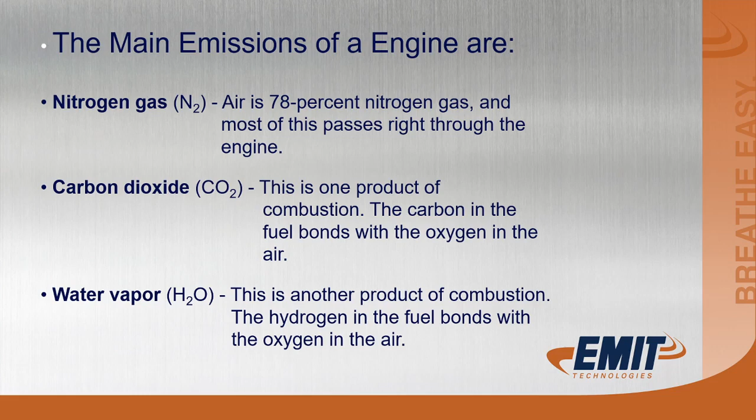Starting off, the main emissions of a natural gas engine are nitrogen gas, N2. Air is 78% nitrogen gas, and most of this passes right through the engine. Carbon dioxide, CO2, is one product of combustion, where the carbon in the fuel bonds with the oxygen in the air. Water vapor, H2O, is another product of combustion, where the hydrogen in fuel bonds with the oxygen in the air.

These emissions are mostly benign, although carbon dioxide emissions are believed to contribute to global warming. But because the combustion process is never perfect, some smaller amounts of more harmful emissions are also produced in engines.

Carbon monoxide, CO, a poisonous gas that is colorless and odorless. Is carbon monoxide bad for the atmosphere? No, it's not. Is carbon monoxide bad for human beings? Yes, it is. Carbon monoxide blocks the ability of your hemoglobins to be able to carry oxygen out to your muscles for your body to use.

Carbon monoxide in the atmosphere dissipates within 48 hours. If you filled a room with carbon monoxide and came back 48 hours later, there would be no carbon monoxide in the room. It would all convert to carbon dioxide. It's one of the easiest emissions to reduce, is carbon monoxide.

Hydrocarbons, or volatile organic compounds, called VOCs, are produced mostly from unburnt fuel that evaporates. Sunlight breaks these down to form oxidants which react with oxides of nitrogen to cause ground level ozone, or O3, a major component of smog.

One of the other VOCs is formaldehyde, HCHO. We're seeing a lot of regulation here in the United States on formaldehydes, and they're proving challenging to reduce on lean burn engines.

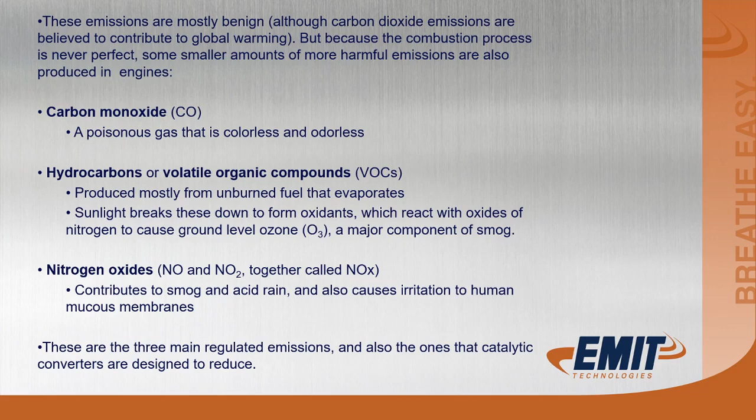These are the three main regulated emissions and also the ones that catalytic converters are designed to reduce.

Pollutants produced by an engine.

In order to reduce emissions, modern engines carefully control the amount of fuel they burn. They try to keep the air-to-fuel ratio very close to the stoichiometric point, which is the calculated ideal ratio of air to fuel. Theoretically, at this ratio, all of the fuel will be burned using all of the oxygen in the air. The stoichiometric ratio for natural gas is 17.2 to 1, meaning that for each pound of fuel or natural gas, 17.2 pounds of air will be burned.

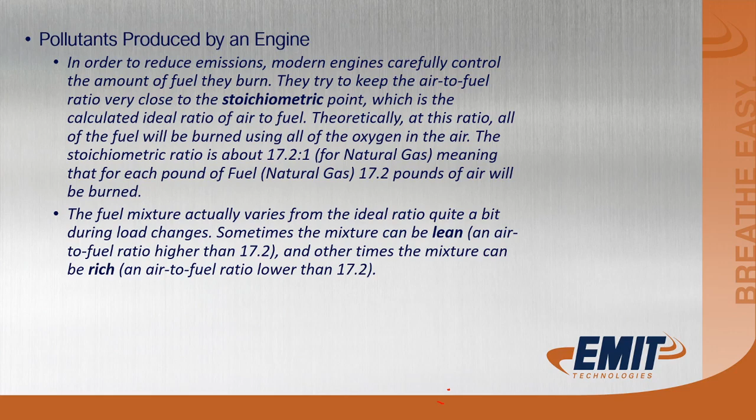The fuel mixture actually varies from the ideal ratio quite a bit during load changes. Sometimes the mixture can be lean, an air to fuel ratio higher than 17.2, and other times the mixture can be rich, an air to fuel ratio lower than 17.2 to 1.

So some of the different stoichiometric ratios: natural gas is 17.2 to 1. Propane is 15.5 pounds of air to 1 pound of fuel. Diesel is 14.5 pounds of air to 1 pound of fuel. Gasoline is 14.7 and ethanol is 9 to 1.

So now you can see why, when we convert an engine from diesel or gasoline to natural gas, natural gas takes up much more space than the gasoline or diesel fuel. Therefore, you literally can't get your bang for the buck out of the cylinder. Your volumetric efficiencies are off.

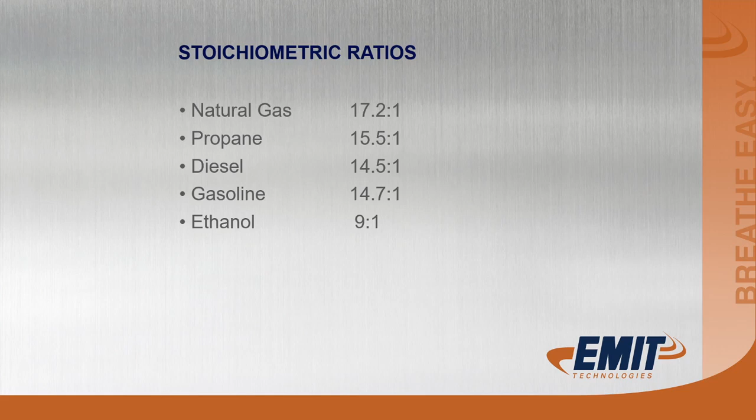Air, in a generic weight, is 1.2 ounces per cubic foot, and natural gas is 0.78 ounces per cubic foot. That tells us that natural gas is lighter than air. It's harder to fill that cylinder with natural gas than it is with air, therefore it takes up a lot more space than gasoline or diesel fuel.

Gasoline is 6.2 pounds per cubic foot, and diesel fuel is 7.1 pounds per cubic foot. Going back to natural gas, it's only 0.78 ounces per cubic foot. So with natural gas being 0.78 ounces per cubic foot, it takes up 127 times the space of gasoline for the same weight. Therefore, it's very hard to charge a cylinder with enough to make a good burn.

Oxygen. What is air? Air is a mixture of several gases that are invisible and odorless. It consists of 78% nitrogen, 21% oxygen, and then less than 1% of argon, carbon dioxide, and other gases. That being said, the 78% nitrogen has absolutely no value to an internal combustion engine. Matter of fact, that 78% nitrogen is where your NOx is coming from.

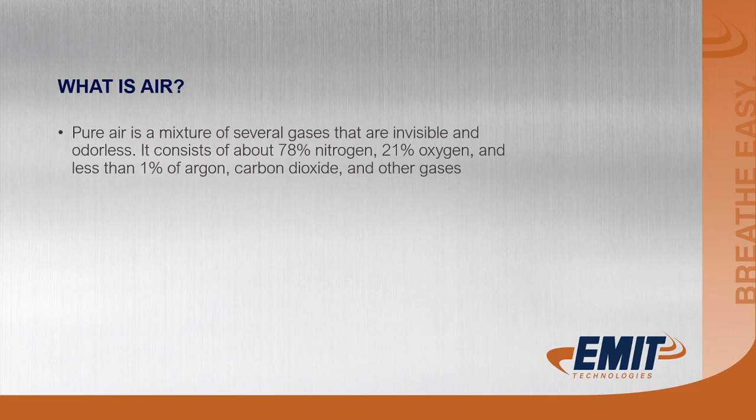Some of the things on an internal combustion engine that can change are valve timing, compression ratios, things like that.

Let's look at where carbon monoxide comes from. When air and fuel come into a cylinder, they are mixed. If you have cold combustion and too much fuel, you'll produce a lot of carbon monoxide. If you have early combustion and high cylinder pressures, therefore high cylinder temperatures, you're going to produce a lot of NOx.

Other characteristics of an engine in the cylinder include cylinder wall quenching. When the gases are mixed together, they're ready to burn. If you had the absolute perfect carburetor or fuel injection system, and your air and fuel could be mixed perfectly, it's not possible for that engine to consume all of that fuel and air. The reason is temperature. Your cylinder walls are cold, your piston's cold, your valves are cold, and any gases next to the cold metal components don't burn. They partially burn, so you have oxygen and fuel, unburned hydrocarbons, going out the exhaust.

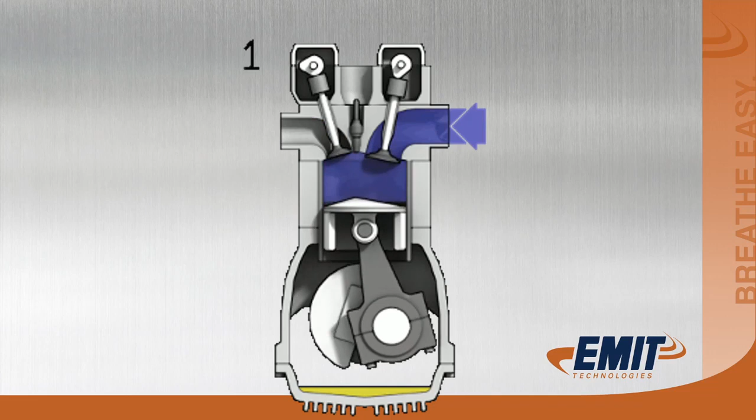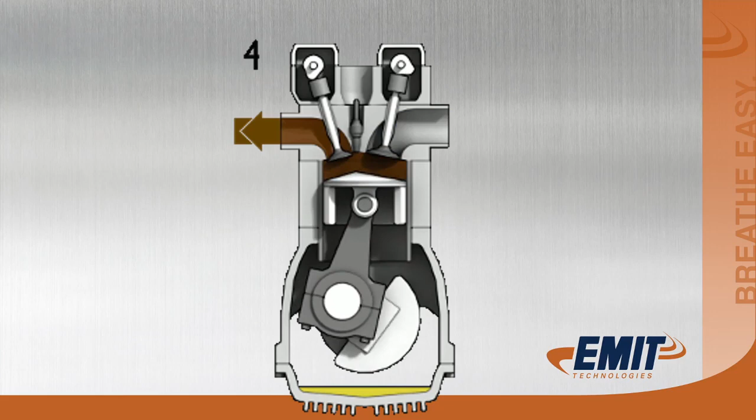The hotter the engine runs, the less unburned hydrocarbons you have. The colder an engine runs, the more unburned hydrocarbons you have. Therefore, you always need to have your engine warmed up before you start testing emissions.

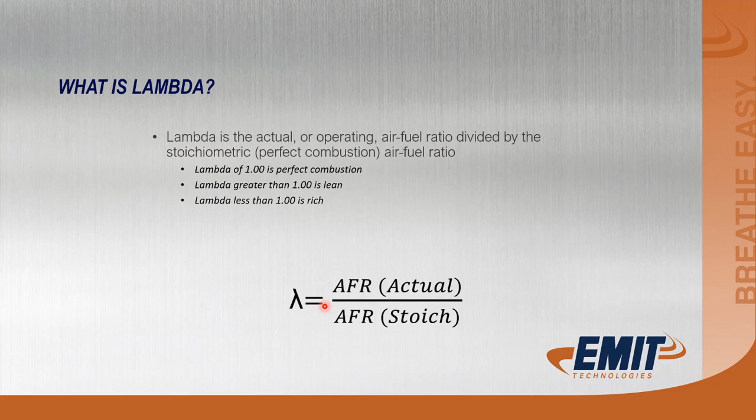The way I lay this out typically on the board: I'll assume an engine runs at 10 to 1, making up our own numbers for easy math. If I ran an engine at 10 to 1, meaning for every pound of fuel I was putting in 10 pounds of air, that makes for easy math. If that engine was using 15 pounds of air for every pound of fuel, that would be a lambda of 1.5. If we were running 5 pounds of air to every pound of fuel, that would be a lambda of 0.5, half of what the actual is.

That's typically where I draw it out on the board and do the math, and then they understand it. An example: if the stoichiometric air-fuel ratio was 10 to 1 and the engine was running at 15 pounds of air to 1 pound of fuel, the lambda would be 1.5, or 15 to 10.

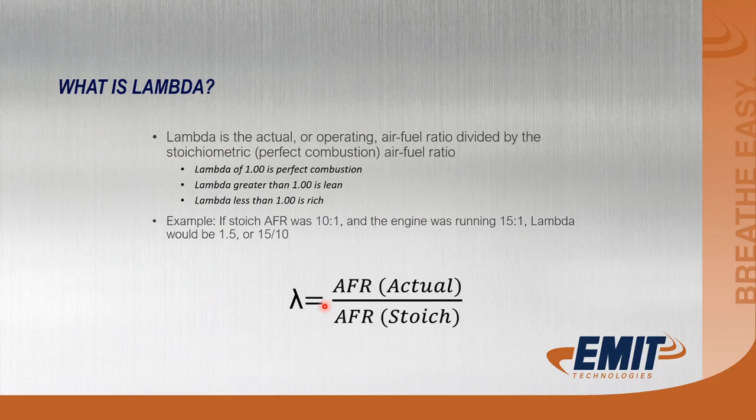Other things that affect the emissions of an engine are valve timing. It is extremely critical to have your valve timing correct on an engine. Most camshafts are designed for an engine to run at 1 RPM. Take the analogy of when you get your muscle car or your Harley Davidson and put a big camshaft in it - what does that do? Other than making it sound good at the stoplight, it really doesn't do much other than now you can turn a higher RPM.

So what does this all mean? Let's start here: the intake valve opens, actually ahead of top dead center. Let's follow that around. Your piston is going down, then coming back up. Now it reaches top dead center, and now it's walking itself down, pulling in air and fuel that are mixed together, and we reach bottom dead center.

Now it doesn't seem logical when you think like a syringe. If you were pulling that piston down, think of a syringe - it's coming down, and you've reached the full travel on the cylinder. The cylinder isn't necessarily charged because of the speed the piston is dropping; it takes more time to fill that cylinder. Because air has mass, and mass has inertia, that's going to carry in - it continues, even though the piston is starting on its way back up, the air is still rushing into that cylinder.

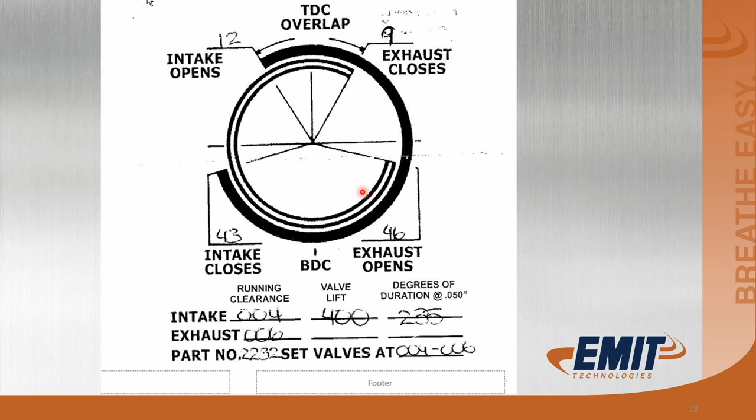Ignition timing has a very large impact on emissions in an engine. So we'll look at this chart, and down here you see negative work and positive work. This right in the middle is top dead center. So we're going to light the fire. Our spark is going to go ahead of top dead center. Why is it that we light the spark ahead of top dead center?

Because it takes time for the fuel to burn. Flame propagation. It takes time for that fire to get going and those exhaust gases to heat up. At the same time, your piston was still coming up at this point.

Now, let's imagine this. This is the perfect scenario right here. We lit the fire, our power curve came up, our cylinder pressures are coming up real nice, and then as the crankshaft is rotating and the piston is dropping down, our cylinder pressures are dropping down just perfect. So we got a really nice burn here. We should be running approximately 3,500 to 5,000 ppm CO, and we should be running between 1,500 and 2,500 parts per million NOx right here.

What happens if our timing's too late? Well, our cylinder pressures are really low and we don't get a good clean burn. So then what happens is as our pressures go down, all of a sudden the thermal gases expand. We don't produce any NOx. We produce real low amounts of NOx because we don't have any heat, and we've consumed all of our oxygen with that fuel with late timing and real low cylinder pressure. So right here we'll have high carbon monoxide and low NOx. This right here will have a nice combination, a 2-to-1 ratio of our carbon monoxide to our NOx.

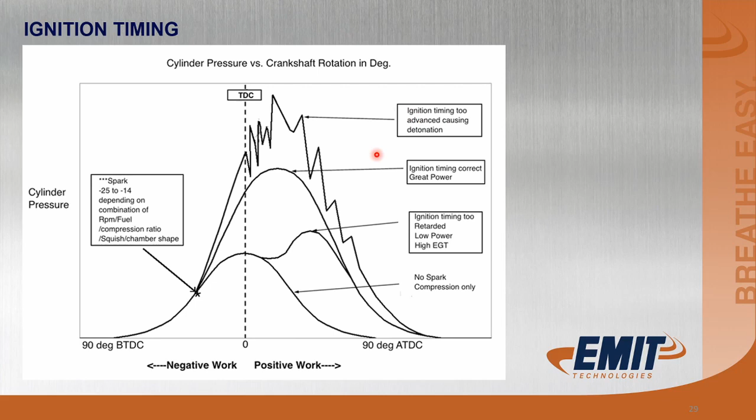How do we measure emissions? We use grams per brake horsepower hour. What does that mean? Grams per brake horsepower hour is how it's spelled out on your permits, and we can use that to convert it to pounds per hour, tons per year, or any weight increment you want.

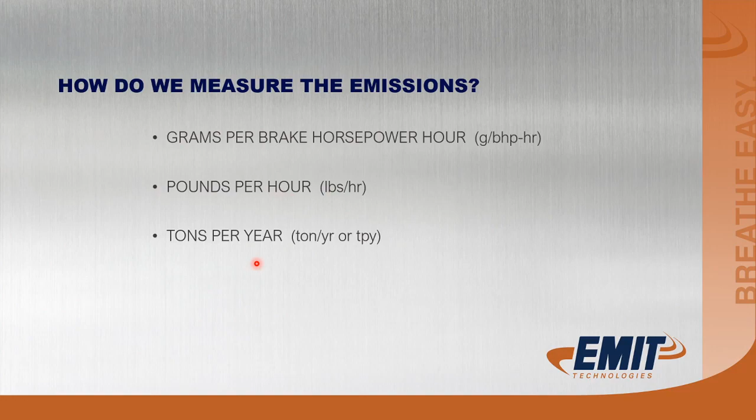What does grams per brake horsepower hour mean? If we break it down, it sounds complicated, but it's not. Grams is a weight. If we had a 1 gram engine, 1 horsepower, and 1 hour, that would be 1 gram of pollutant if that was a 1 gram engine.

Let's think about how this works. Grams is weight, brake horsepower is performance - how much work did we get done - and this is time. Now the thing we have to understand is horsepower. What is horsepower? We don't have dynos out on these units, so we have to extrapolate what the horsepower is doing, typically by knowing how much fuel was going into the engine.

So if we had a 1 gram permit and a 100 horsepower engine, in 1 hour you could produce 100 grams of pollutant.

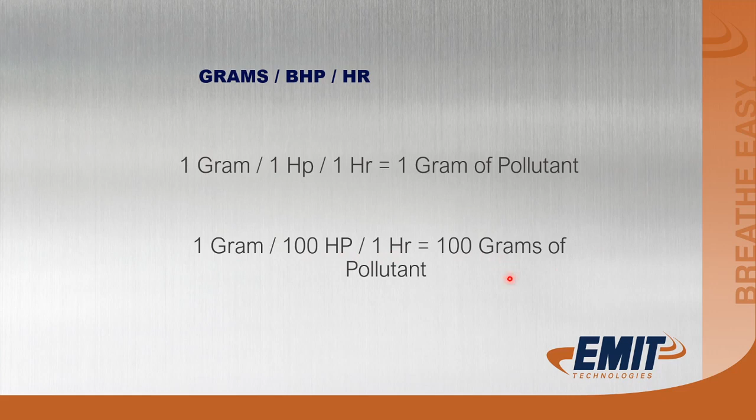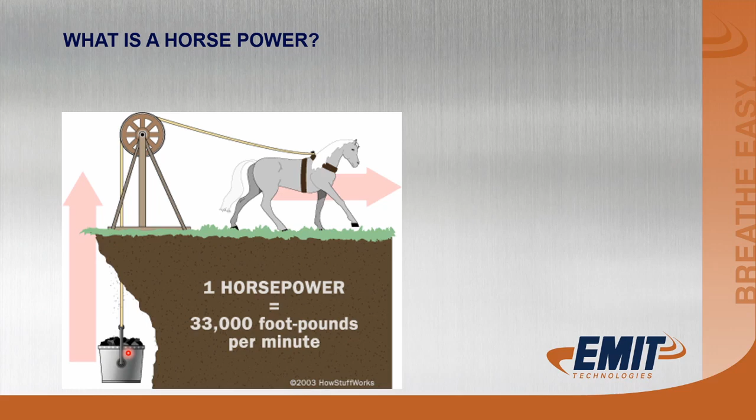James Watt came up with the horsepower calculation. One horsepower equals 33,000 foot-pounds per minute. In other words, a horse could pick up 33,000 pounds, 1 foot, walking for 1 minute. That's how they calculated horsepower.

How much natural gas does it take to make 1 horsepower? Ultimately, that's how we determine how much horsepower we're using, by using engine manufacturer specifications and how much fuel it takes to make 1 horsepower.

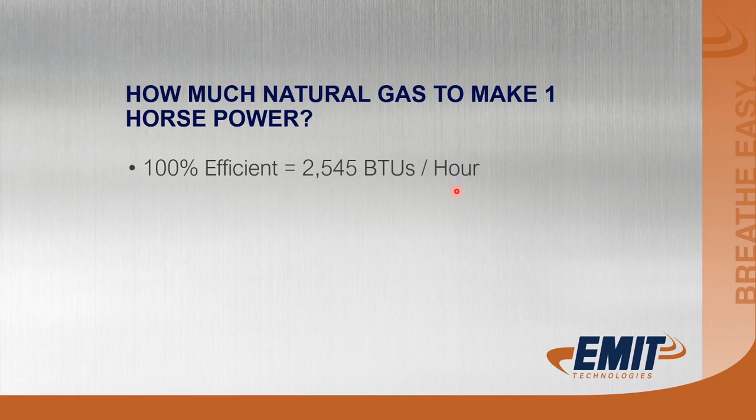100% efficient is 2,545 BTUs per hour. That's at 100% efficient, but no engine is 100% efficient.

Rich burn default is 9,400 BTUs per hour to make 1 horsepower, which tells you how inefficient a rich burn engine is at converting fuel into horsepower. A lean burn engine default is typically around 8,600 BTUs per hour, making it more efficient at making horsepower out of the fuel given.

Horsepower as it relates to BTU: horsepower can be defined as 2,545 BTUs to make 1 horsepower in 1 hour. However, most of the available BTUs in the fuel are wasted as heat exiting in the exhaust. For an engine to produce 1 horsepower in 1 hour, it consumes approximately 10,000 BTUs. This value is very useful for determining regulator and fuel delivery piping sizes.

You can also determine, when out on location, how much horsepower is being made if you have a fuel flow meter for that location. You can look at the fuel flow meter and know approximately how much horsepower you're utilizing. Actual fuel consumption ranges between 7,000 and 10,000 BTU per brake horsepower hour.

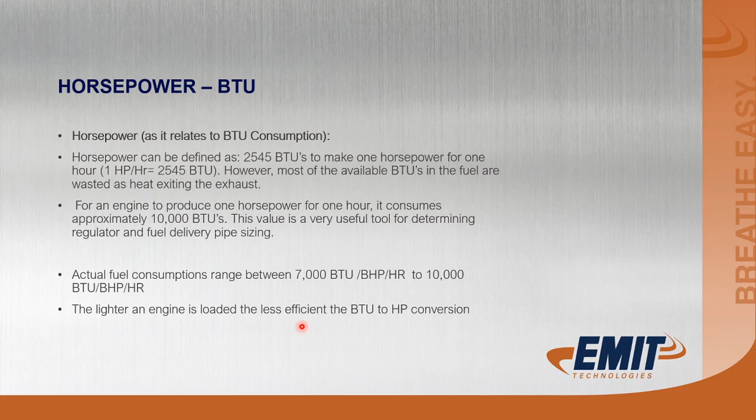This is very key to remember: the lighter an engine is loaded, the less efficient the BTU to horsepower conversion is. In other words, work the engines hard and they convert fuel into horsepower much better than if they're lightly loaded. You'll get much better emissions on an engine with a good load versus one that does not have a good load.

One of the ways we determine it is by using GERP on a Caterpillar engine. Caterpillar provides information that makes it much easier to determine what that horsepower is, so we don't have to assume defaults of 9,400 or 8,600 BTUs for rich or lean burn.

So when you pull up a GERP sheet from Caterpillar, you can look at the load. As you're looking at this load, brake horsepower on this particular engine is a 3306B. It's an 1,800 rpm engine, aftercooler, water jacket. You can look at all the specs all the way down.

It's a catalyst setting engine. Exhaust oxygen is at 0.3% oxygen. We know this is a little rich burn Caterpillar 3306. So now, it's capable of 203 horsepower at full load. At full load, we can see its efficiency is 8,100. It's actually a very efficient little engine when we have a full load on it. For a rich burn engine, that's great.

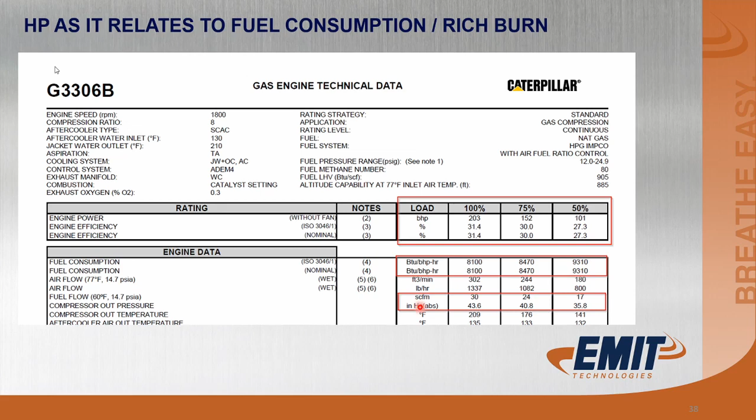As we drop in horsepower to 75% at 152 horsepower, look at our fuel consumption per horsepower, brake specific fuel consumption. The brake specific fuel consumption goes up, and we get down to 50% load. We know that it's extremely inefficient at 9,310 BTUs per brake horsepower hour, and when it was loaded, it was 8,100 BTUs per brake horsepower hour. We can do it in standard cubic feet, or we can do it in BTUs.

Now, if we look at a 3516 Caterpillar, which is a lean burn, this one's going to run at 1,400. Compression ratio is 8:1, and so was the rich burn on the 3306B, 8:1. But we're gonna turbocharge the heck out of this thing. We're gonna push a lot of air into it, and for a lean burn engine, we're gonna push the NOx level down to 0.5 grams per brake horsepower hour. Now let's look at this. Per brake horsepower hour, we're making 1,380 horsepower on this particular 3516.

And when we look at the fuel consumption, it's clear down around 7,301 BTUs per horsepower being produced. If we drop clear down to 50%, we can look again. That's going to be 690 horsepower, and the fuel consumption now jumps way up to 8,399.

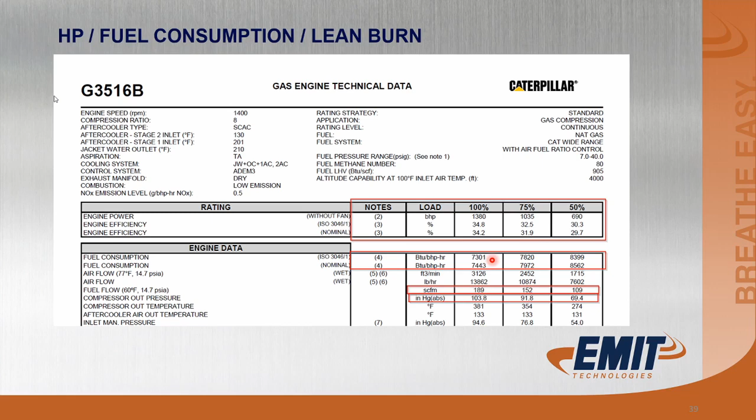So you're always better to use factory specifications if you have them. In the US, the EPA defaults to those 9,400 and 8,600 respectively when you don't have performance data for the engines. Always best to have the actual performance data from the manufacturer.

Just an interesting piece of information: it takes 641,186.5 calories to make 1 horsepower in 1 hour. All right, so now to convert those grams to brake horsepower hour, we know that it takes 28 grams to make an ounce, 16 ounces to make a pound, and 2,000 pounds to make a ton. That's how we convert our grams into pounds per hour or tons per year.

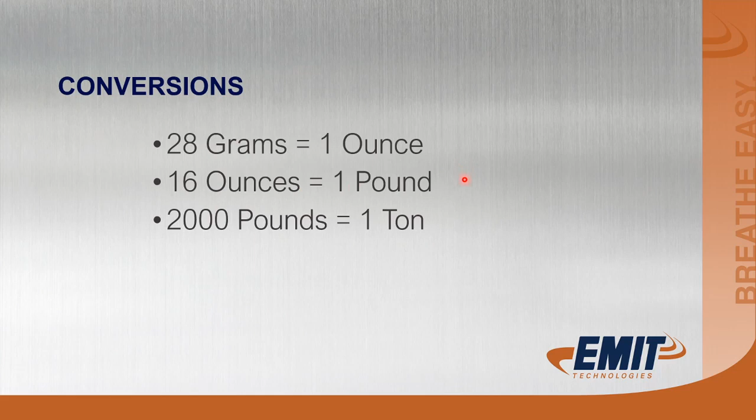They tend to fail in high VOC, high unburned hydrocarbon environments. The cells will saturate and they'll either ruin the cells, or the cells will take quite a while to air out till the next day before you can use it again. And those cells are typically in the $500 a piece, so you don't want to be messing them up. And it only takes a few minutes to ruin one. So this should always be using an analyzer - same guy should use it, or the people using it should always be trained.

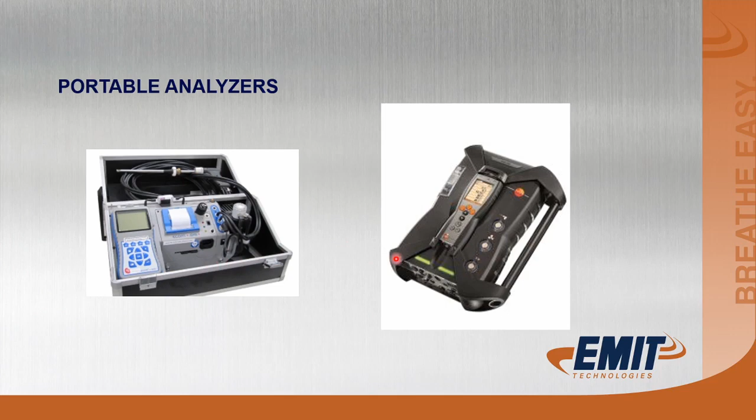On this 100 horsepower uncontrolled engine, it starts out about 6,500 parts per million CO, which equals 17 grams per brake horsepower hour. At 100 horsepower that equals 1,700 grams per hour. Divide that by 28 grams to get an ounce, you get 61 ounces an hour. Times 24 hours equals 1,464 ounces per day. Divide by 16 ounces to get pounds, you get 91.5 pounds per day. Times 365 days a year, that's 33,397 pounds per year. Divide by 2,000 to get tons, and you get 16.5 tons of carbon monoxide off that little 3306 running 24/7, 365.

We can run through the same equation with the NOx. NOx is a little bit heavier, so it doesn't take as much to get the weight there. Here we're only starting at 2,200 parts per million, which equals 10 grams per brake horsepower hour. Running through the equation, we get 9.7 tons per year. Using the same math, we come up with 7 tons per year for hydrocarbons. This little uncontrolled 3306 cat is making about 33.2 tons per year of exhaust pollutants.

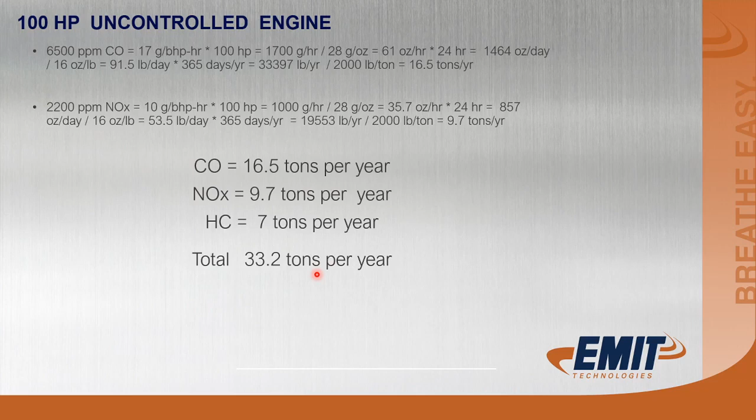Now what happens when we add a catalytic converter to this? If we add a catalytic converter and an air-fuel ratio controller to the engine, and we drop the emissions down to 0.5 grams per brake horsepower hour, which is a pretty standard emissions level in the United States for non-attainment areas, that took that number from our 33.2 tons per year down to 1.228 tons per year. That's a pretty significant reduction in emissions. So that's why we run a catalytic converter and an air-fuel ratio controller.

What is a catalyst? A catalyst is a substance that affects the rate of reaction without itself being consumed by the reaction. Generally they increase the rate of reaction, but they can also slow down the rate of reaction due to a change in the specificity of the reaction.

Let's break this down into something simple. Everybody's worked with concrete. If you have some concrete aggregate, some rock and sand, and then some fly ash and some concrete powder, and you mix it all together, it does absolutely nothing. It's just dirt and sand and rock and some fly ash and cement powder. But we have to add water to that concrete. If we add water, we start to build heat and things start to happen. That's the part where generally they increase the rate of reaction. If we didn't add water to the concrete, nothing would happen.

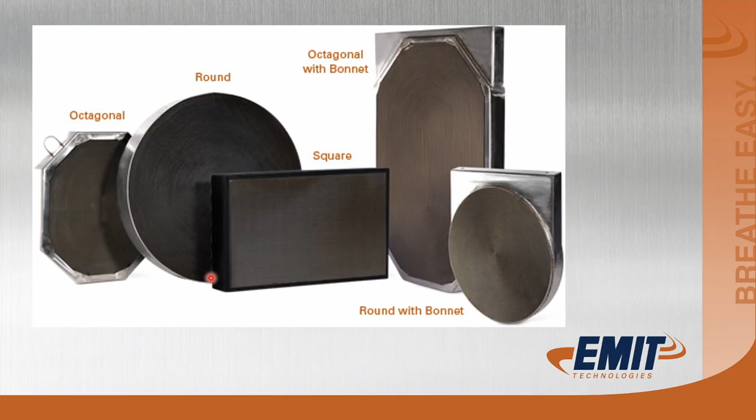There's a lot of different shapes when it comes to catalysts, and a lot of different manufacturers out there. There's octagonal, round, rectangular, octagon with a bonnet, round with a bonnet. A lot of different shapes.

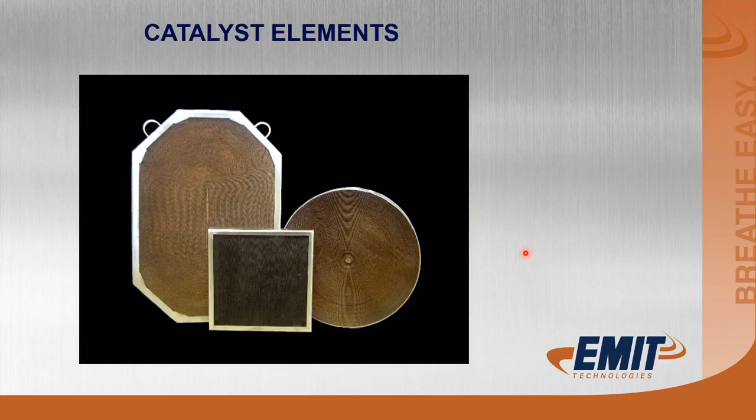If a catalyst is brand new, sometimes you can tell whether it's an oxidation or a three-way catalyst. Oxidation catalysts will typically have a little bit of a brown or goldish hue to it, while a three-way catalyst is typically a darker brown or darker black color. Once they've been run, you can't tell that anymore.

Now, how is a catalyst made? We start out with ferritic stainless steel. Ferritic stainless steel is magnetic, you can stick a magnet to it and it'll attach, whatever you'd like. That's how the properties on this foil oxidize. The foil is really thin.

It's about 2 thousandths thick, that's all that foil is. Very, very thin. So we have a flat sheet, and then we take another flat sheet and run it through a set of dies, and that corrugates the foil and starts to roll it together.

In years past, this was a standard way of manufacturing the catalyst element, but there were a lot of challenges related to this due to telescoping. The foil would come unraveled and wouldn't sustain backfires very well.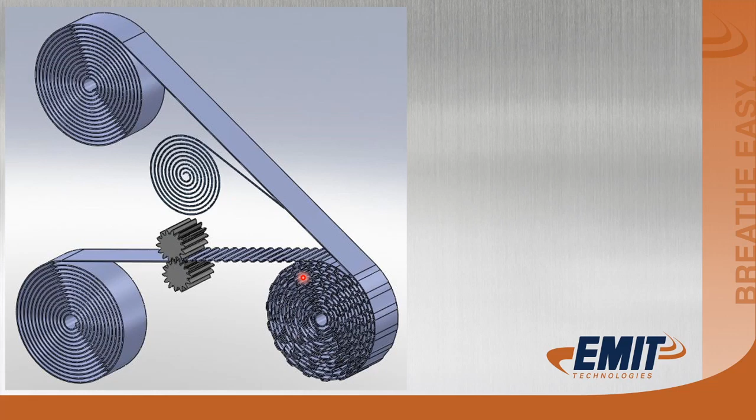As we roll it up, the foil goes over top of the nickel and is rolled up within it. Once the catalyst is completely made and made to the diameter needed, it's put in an oven and heat treated. At that time, this nickel sweats out like solder or brazing and welds all these high points together, making it a solid or rigid substrate. Makes it very strong. No more coming apart or failing during backfires or telescoping from heat in the center.

So the corrugation is typically an equilateral triangle. Both sides of this are the same, all sides of the triangle are the same dimension. That's how we get a lot of square footage in the foil itself.

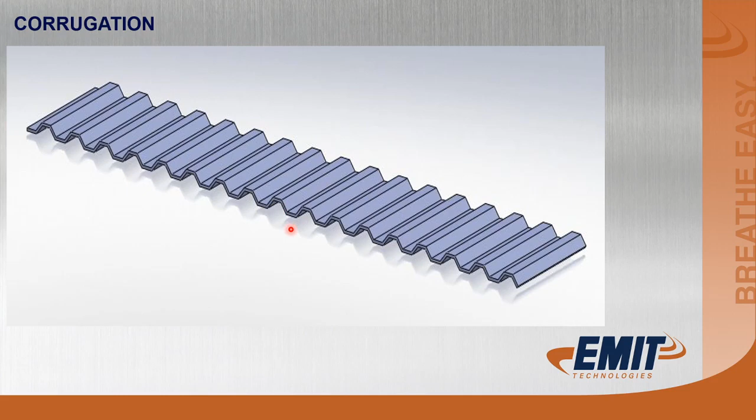We get a lot of surface area so that we can attach our wash coat. So the bottom sheet, this is 2 thousandths thick. This foil is 2 thousandths thick. This is 2 thousandths thick. We add the top sheet.

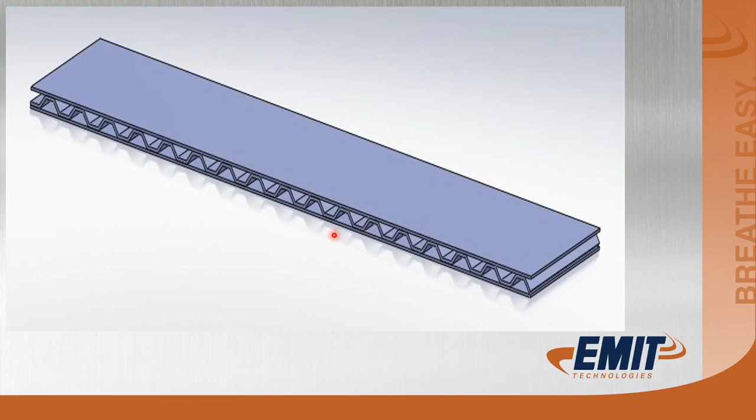It seems like it'd be restrictive, but this is a 90% open area. There's not much restriction there. It takes an awful lot to plug a catalyst up. When you do plug a catalyst up, you know you've got some pretty serious issues.

It's just a slide with the brazing, showing the brazing, the importance of where it's bonded together and how much stronger it makes it.

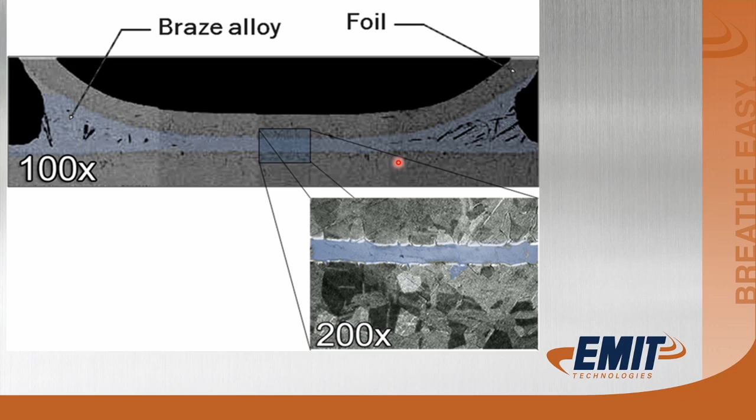This is just a slide to tell you that an unbrazed catalyst, if you laid it on a table, it would take 461 pounds on a 14.5-inch catalyst to start separating it if you had it pushed down overhanging the edge. If you had a brazed substrate hanging over the edge of a table halfway, it would take 3,120 pounds to break that.

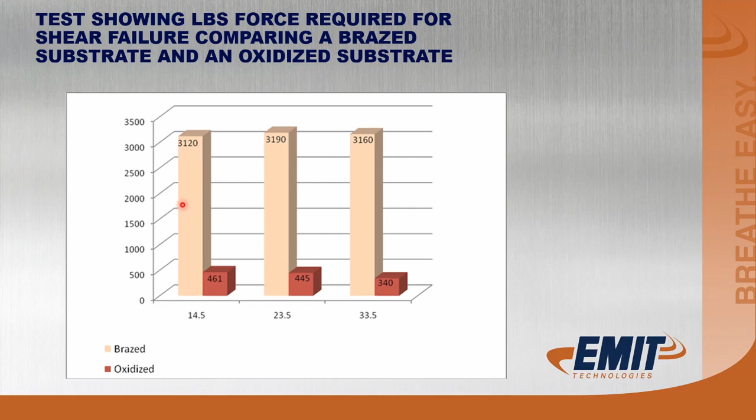These are the benefits of a brazed catalyst element versus an unbrazed catalyst element.

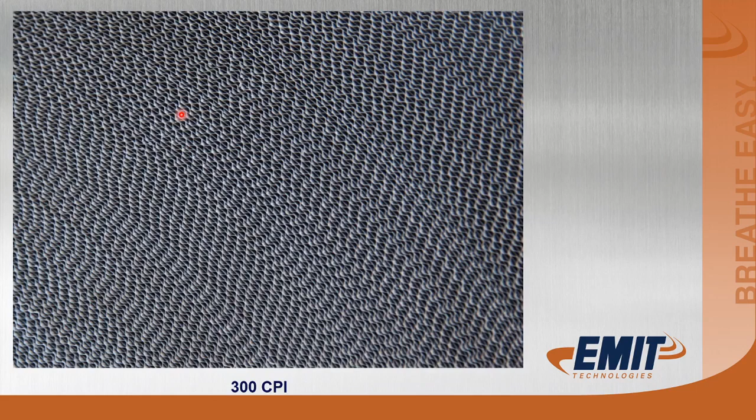This is what 300 cells per square inch look like. Doesn't seem possible, but there's 300 cells per square inch here. A closer look, you can see the foil where it's stacked up, and where it's brazed. All of those contact points are brazed together with the nickel, called rigid substrate.

What do we put on the catalyst? Well, when the catalyst was in this state here, it had no wash coat on it at that point. The catalyst was just stainless steel, it wasn't going to do anything for you, just a big spark arrestor. But then we use a mixture of platinum, palladium, and rhodium.

These precious metals are ground up microscopically fine and then put into a slurry or wash coat where they can be spread out across the catalyst foil.

Why do we use platinum, palladium, and rhodium? Why don't we use something else? Well, when you think about it, platinum is white gold. All of these things are very corrosive resistant. They withstand high temperatures, and they each have their own properties when working or reacting with the exhaust gases.

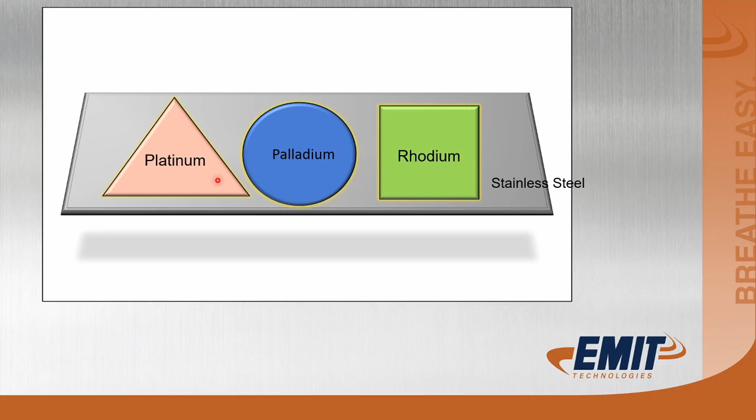If we took a really close look at the foil, this would be our 2 thousandths thick foil, and this would be our wash coat. Mixed in that wash coat are these microscopic particles of the precious metals.

What are some of the things that damage a catalyst? There's a lot of things that'll damage a catalyst. If we get it really hot, over 1250 degrees, this alumina wash coat starts to collapse. It's the carrier. The precious metals are still there, but it traps them in an area where the exhaust gases can't get to them. Nothing happened with them, they're able to react just fine, but the gases are not able to get to them.

I always make the analogy, think of a styrofoam cup. If you heat up a styrofoam cup too much, it'll collapse into almost nothing.

You still have all the styrofoam there, but it isn't doing any good whatsoever. These areas are where exhaust gases can migrate through and make contact, and these are called sites. The more we heat it, the fewer sites become available. The catalyst is still functioning at this point, but not the way it was when new, before we melted the wash coat of alumina.

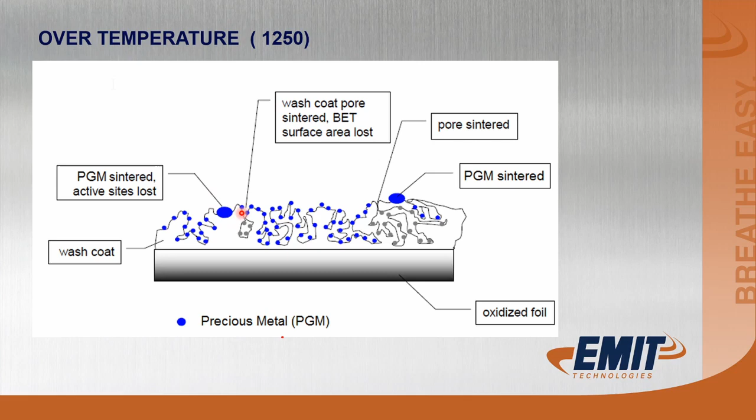Sintering is when you get it really hot, hot enough that you've melted the precious metals, and now your platinum, palladium, and rhodium have all bonded together. They are worthless at that point. You have no surface area, not enough areas to make contact.

The precious metals, active metal or base metal elements which are active in the combustion reaction, are platinum, palladium, and rhodium. These metals are known for their purity, high melting points, and ability to stay stable at high temperatures. In addition to stable oxidation and reduction properties, they are also extremely resistant to corrosion.

Platinum and rhodium are effective in reducing NOx. Platinum and palladium are effective in oxidizing CO and VOCs. Platinum is more poison resistant, palladium is more thermally stable. So the idea behind mixing these three items: you can have more platinum and rhodium to reduce NOx better, or more platinum and palladium to reduce CO. If you want a catalyst to reduce NOx better, add a little more rhodium. If you want it to reduce CO better, add a little more palladium.

Platinum is more poison resistant. What do we mean by poison resistant? It means it can take on things like cyanide, which will kill almost any catalyst. Ethylene glycol, or antifreeze, destroys a catalyst very quickly. With engine oil additives and things in the gas coming into the engine, platinum is going to stand up to that a little bit better.

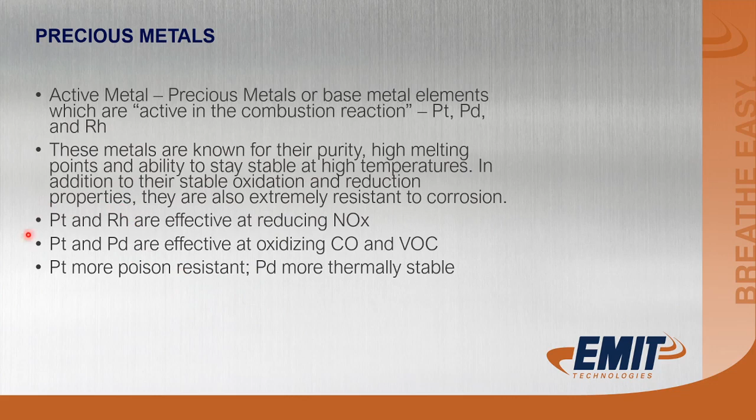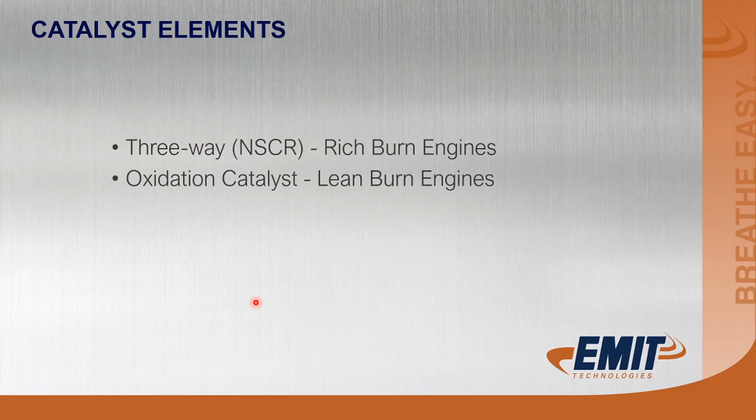Catalyst elements: three-way, or NSCR—non-selective catalytic reduction—is for a rich burn engine. Oxidation catalyst is for lean burn engines. Oxidation: if an electron is lost, then an oxygen will be gained. Platinum and palladium reduce CO and VOCs. Redox, or reduction oxidation: if an electron is gained, an oxygen will be lost. Platinum and rhodium reduce NOx.

NOx is the hardest thing you're going to be able to reduce on a rich burn engine, and you can't reduce it on a lean burn engine outside of post-catalyst treatment like SCR, selective catalytic reduction. When an engine isn't set up correctly, this becomes the first thing that fails—your NOx reduction fails the quickest. If you have exhaust leaks, misfires, or anything that increases the oxygen content in the exhaust gases, you will fail to reduce your NOx.

We have to use up all of the oxygen. If an electron is lost, an oxygen will be gained. So when we're reducing carbon monoxide, CO, we need free oxygen to turn that into CO2, carbon dioxide. We use up all of the free oxygen making carbon dioxide, and once we've used it all up, that's how our NOx is reduced—it goes after this oxygen. The carbon monoxide is still very active in looking for oxygen to convert to CO2.

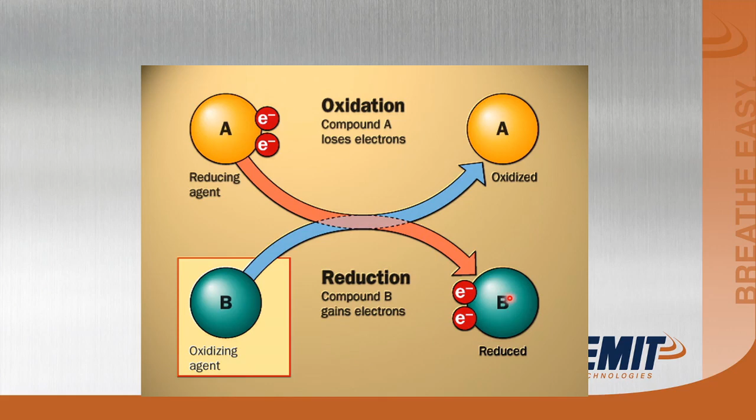NSCR is a term we use for non-selective catalytic reduction. In the presence of oxygen, the oxidation of CO and VOCs are preferred. Like we spoke earlier, CO and VOCs will oxidize very easily when there's oxygen present. Therefore, in order to get NOx reduction, you have to limit the amount of oxygen available in the catalyst. This is a rich burn we're talking about now. Typically, exhaust oxygen levels between 0.3 and 0.5% to obtain appreciable NOx reduction. And you need the temperature between 500 and 1,000 degrees to achieve maximum reaction rates. Typically, once you get over 450 to 500, the catalyst isn't going to reduce carbon monoxide much better.

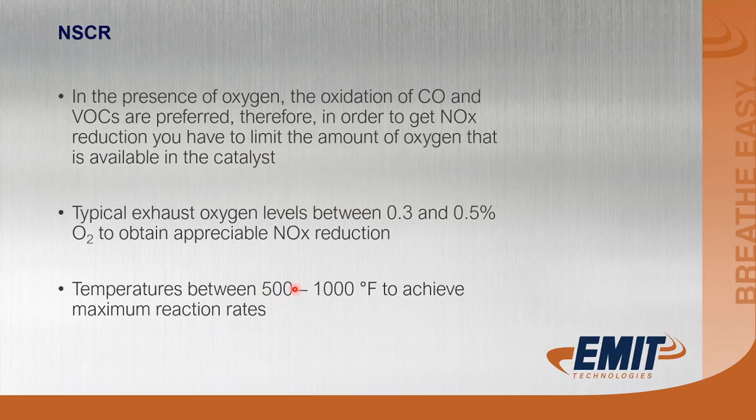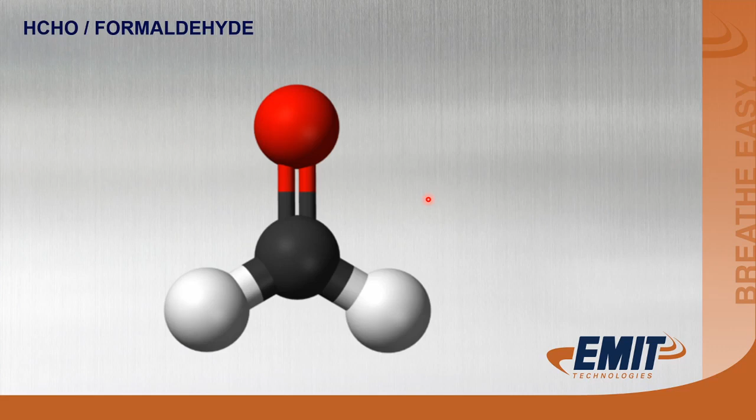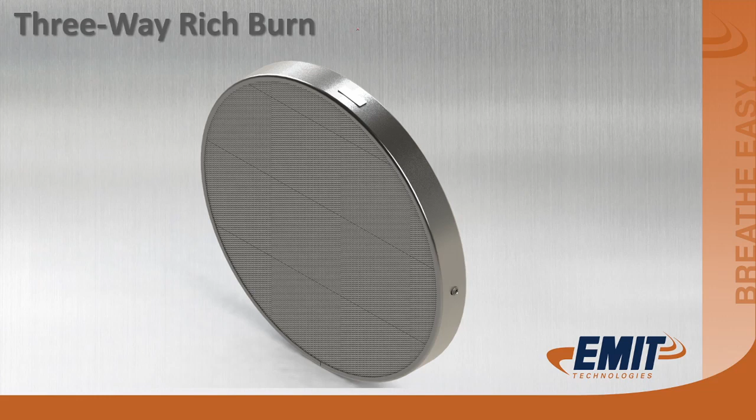We're going to go through the three-way catalyst or rich burn catalyst. Another name for the rich burn catalyst is NSCR, non-selective catalytic reduction. Now, one of the things that's always in an exhaust stream is oxygen. And we were talking earlier, you have to limit your oxygen in your exhaust stream to 0.3% and no more than 0.5%. That's going into the catalytic converter.

Now, the next thing that's always in your exhaust stream is carbon monoxide, carbon and oxygen. It typically goes in, we're going to use numbers of 5,000 ppm. It can be 5,000, could be 3,500 to 5,500, even 6,000. Depending upon what your emissions permit is and how well your catalyst is working is going to determine where those numbers come down to. But let's assume it's 5,000 parts per million going into the catalyst. And then our NOx, again oxides of nitrogen, is going to go in, and let's assume that's half of that, a 2-to-1 ratio, at 2,500 ppm going in. Then the last thing we want to think about is our temperature.

On a rich burn engine, temperature can vary quite a bit, from a little naturally aspirated 3306 where you might have a hard time making 500 degrees, to a 7044 Waukesha where they're running 1350 coming off the turbos, which is pretty hot. 1250 is probably a little more normal. But optimally, we're going to shoot for that 800 degrees going into this catalyst.

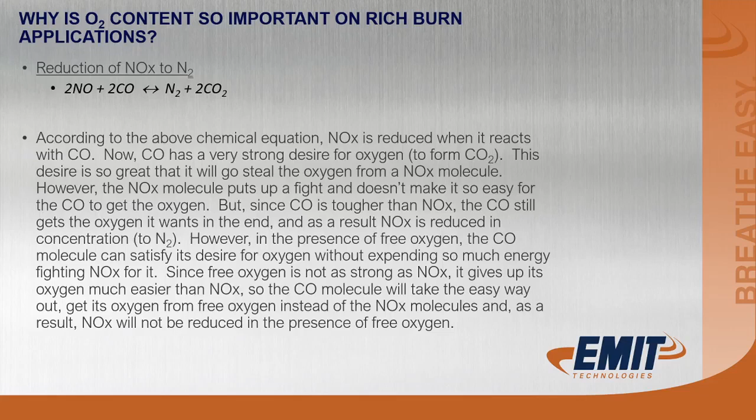Like we explained earlier, the aluminum wash coat's going to collapse, and the precious metals are basically going to drown within the aluminum wash coat, and not be available to make an active site available to the exhaust gases because it's completely coated and submerged in the alumina. So now another example would be what happens when the engine is set too lean. We'll go ahead and erase everything on the slide.

I'll erase everything on the slide and we'll start over. What happens if we have an engine that's set to lean? Okay, we'll lay that scenario out.

If we get an engine that's set too lean, that means our oxygen is going to be increased. Typically, on a rich burn engine, we want to see that 0.3 to 0.5%. We're going to stick with the 0.3 right now.

What happens? We go to set to lean and we're at 0.7%. It has the same effect as if we had an exhaust leak. But this time when the engine is set lean, it's our oxygen - our CO could drop. It was 5,500, it'll drop drastically, maybe it starts out at 2,500. Our oxygen is still going to get reduced, but we don't have near as much carbon monoxide being turned into CO2 to utilize this extra oxygen content.

But we don't have a lot of CO. It's going to come out of there - it could easily come out at 50 ppm or less, because we didn't start out with very much and we had plenty of oxygen to make CO2.